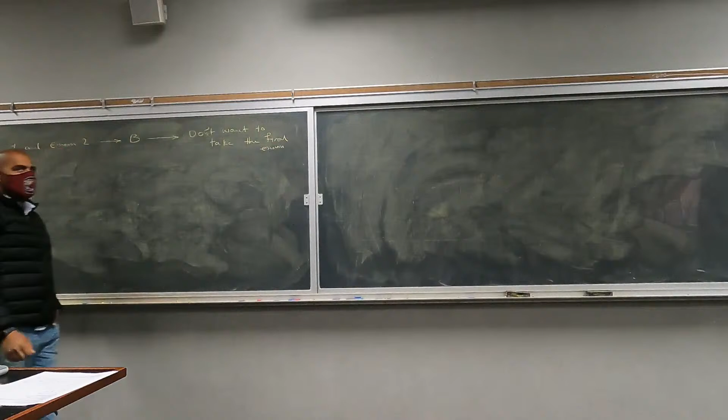If you have already done well on your exam 1 and exam 2, let's say you have received a B, or you have received a C and you are satisfied with your grade, right? You can send me an email and tell me that you don't want to take the final exam and you are satisfied with your grade. And that is perfectly acceptable to me, as long as you submit your final homework. Okay? So if you have like an A in exam 1, 2, you can send a request after your final exam. Yes, that's the idea.

Because essentially what I'm doing for the people who have not done well in their previous 2 exams is that the least thing I'm going to do is to drop one of the exam grades, right, and replace it with your final exam. So it's only fair for this to go the other way as well. If you have done well in your first 2 exams, you should be rewarded. Or if you're only satisfied with your grade. B is a very good grade. C is also a very good grade.

But if you think your grade is going to be less than C, it is probably a good idea to take the final exam, because there are a couple of courses that are going to need a grade C or better in this course. Okay. And next thing, if you have done well in one of the exams, 1 or 2, one of them, and if you do well on your final,

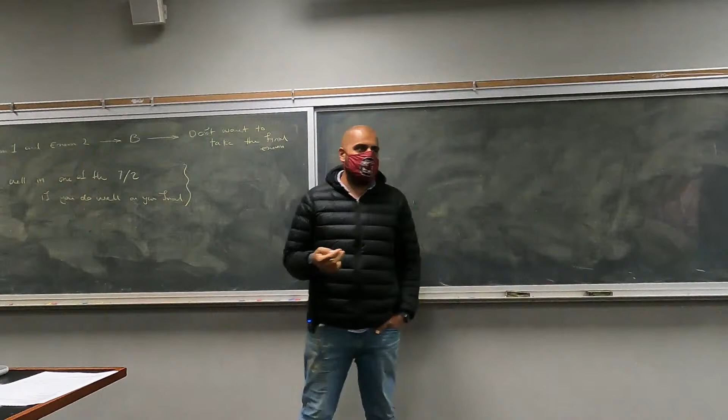I'm going to replace your lowest grade with your highest grade. Doesn't really matter if you have done well or not done well. This is one thing I'm going to do, right? Let's say your exam 1 grade is 70, your exam 2 grade is 85, and your final exam grade is 82, right? I will replace your exam 1 grade with exam 2 grade, which is 85. And that applies to everyone in the class. Okay?

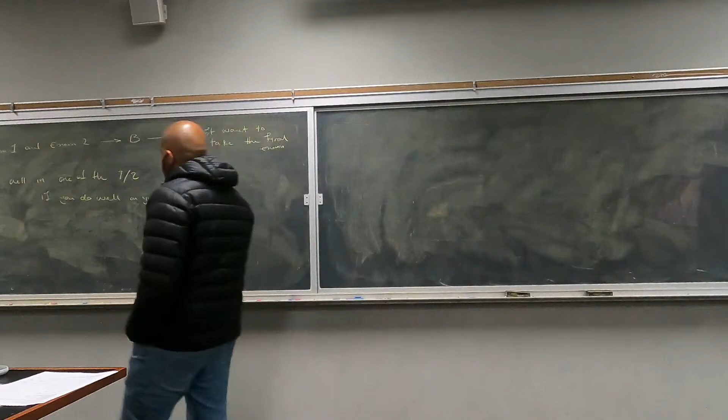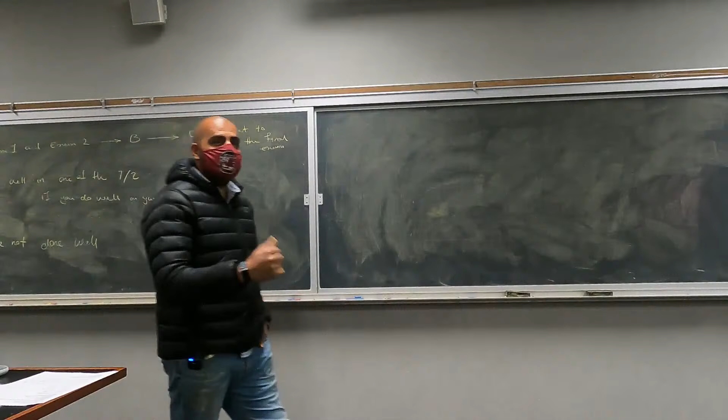And the third one is that if you have not done well in any of the exams, let's say your average grade is, I don't know, you have a failing grade, okay? But you have submitted all of your homeworks, you have come to all of the exams, you haven't missed anything, you have been through the class, and you get an A on your final. I will give you, depending on your grade and your average, a B or a B plus, right? Does this make sense?

And there are a couple of people who have not participated, taken their exam 1 or 2, or have not submitted their homework. If you are in that group, and if you do very well on your final, if you get an A on your final, I will give you a C out of the course, right? So your final exam grade can actually change everything, right?

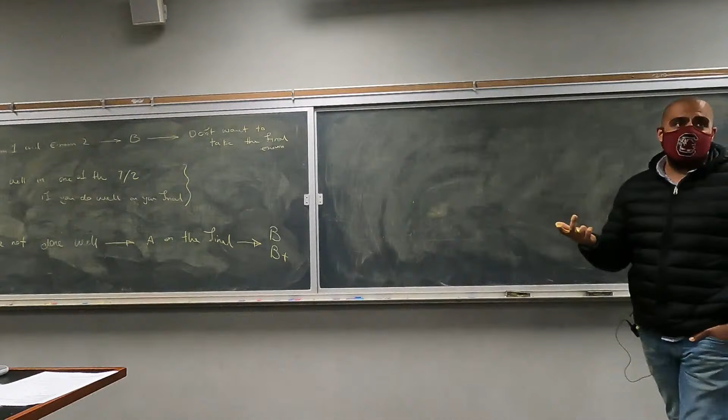And there are a couple of people who have progressed very well in the course, like from a very bad grade on exam 1 to a very good grade on exam 2. If you continue on your progress, you will definitely be rewarded, right? Are there any questions about the grades? No. Okay, so it is all clear, hopefully.

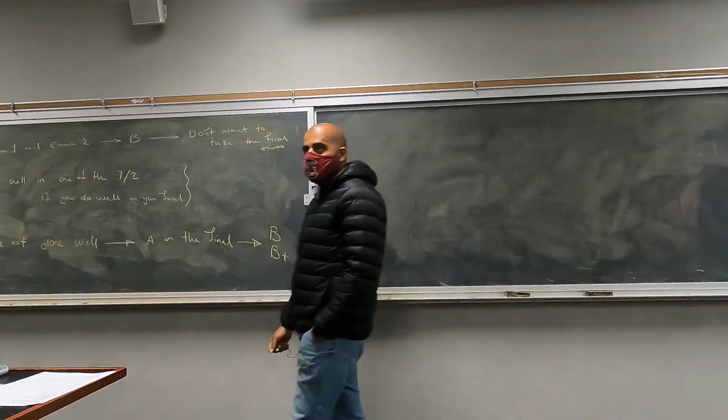So let's talk about, and this is what we're going to do today. I'm going to read through these conceptual problems. I will ask for an answer. If you have the answer, you'll get a bonus point. If not, I will just give a brief answer and move on, okay? The same thing we did in the previous lecture.

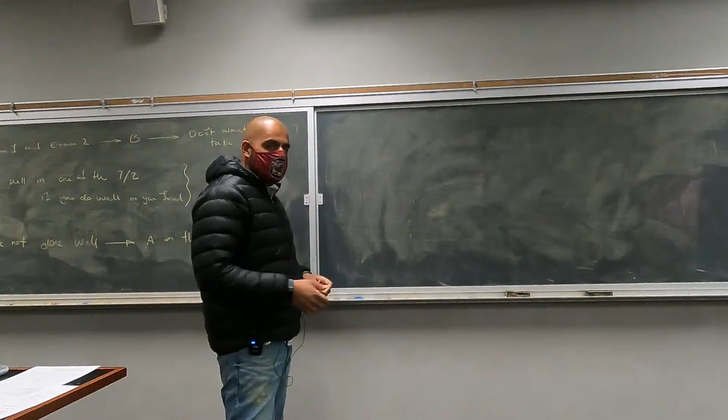But I need to borrow a pen. Is there anyone who has an extra pen or a pencil that I can borrow? I forgot to bring my own pen. Thank you. Thanks.

Okay, so what are absolute and gauge pressures? Absolute includes the atmospheric pressure as well as the pressure inside the tank. And gauge is just whatever's inside the tank. Okay. So essentially, your absolute pressure as compared to the vacuum pressure, this doesn't work.

Can I get it? I'm sorry. Thank you.

So absolute pressure, you compare your pressure with the vacuum pressure, which is essentially zero pressure. But the gauge pressure, you compare your pressure with the atmospheric pressure, right? So what is the gauge pressure of the regular atmosphere? The gauge pressure, not the absolute. Zero, exactly.

Okay, the next part is what is viscosity? Do we have any takers here? Viscosity was essentially the thickness of your fluid, right? In an exam, you have to explain it a little better, but how easy or hard it is for a fluid to flow and how it responds to the shear stress.

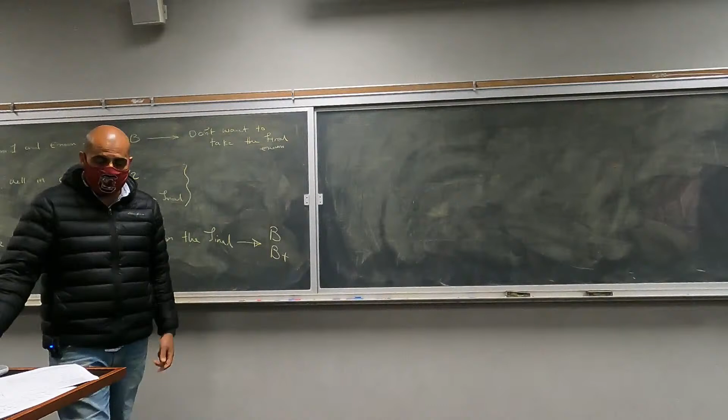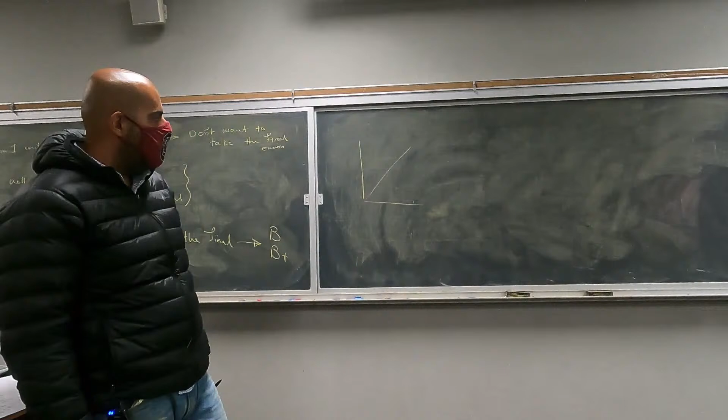Next question, what are Newtonian fluids and what are non-Newtonian fluids? Do we remember this? Newtonian fluids were the fluids that had a linear relationship, right? Their shear stress had a linear relationship with viscosity, like this. We talked about it in chapter 1, so they are already in the lecture notes. If you go back to lecture notes, you will see that this is there. So they have a linear relationship, and this is the relationship between viscosity and shear stress.

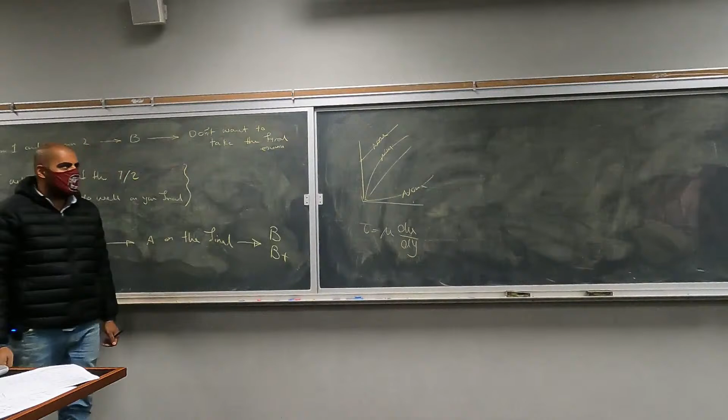But we have non-Newtonian fluids that do not behave linearly. These are all non-Newtonian. Viscosity does not change linearly with the shear stress. And the examples of it are shear thinning, shear thickening fluids, and Bingham fluids. These are also in your notes.

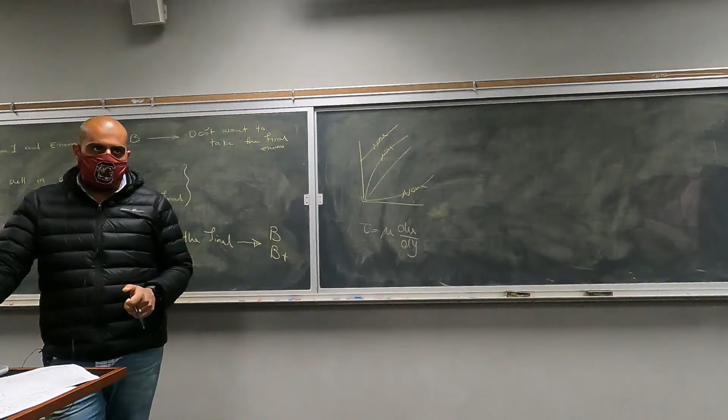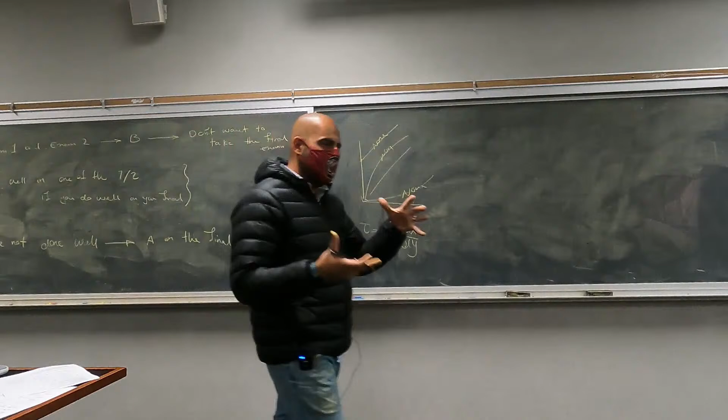What is the vapor pressure? When the equilibrium condition is reached, the number of molecules leaving is equal to the number of molecules entering. Equilibrium condition. So essentially that's exact. If you have a fluid in a closed container, you will have vapor forming on top of that liquid. When it reaches the equilibrium, that pressure of that vapor is called the vapor pressure.

What's your name? Hannah. Okay.

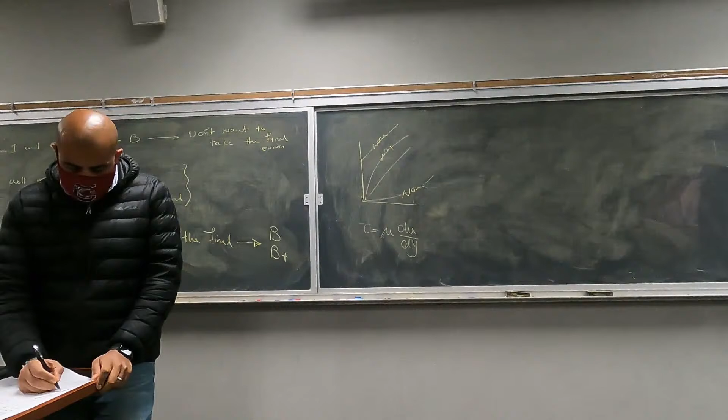What is pressure? This will probably show up in some form or another on your exam, because a lot of you struggle with the concept of pressure. Anyone? Yeah. That's it. What kind of force, though? What's the direction of that force? Normal force, right? But you'll get the bonus anyway, so don't worry about it. Pressure is normal force per unit area. Let's say this is your force applied to the surface. Pressure is the normal component of that force divided by your area. So pressure, normal force per unit area.

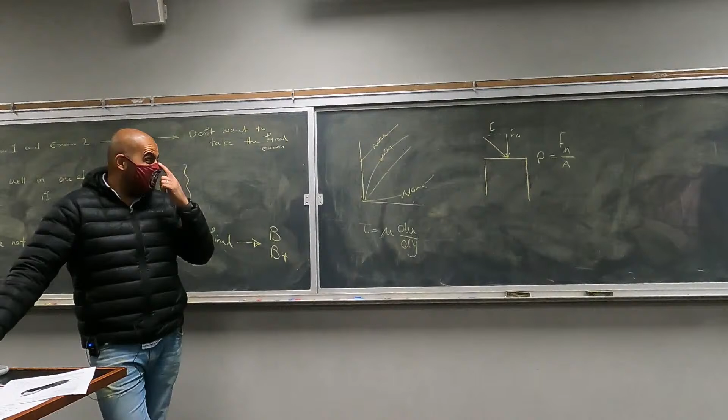And the next one is something we had on exam 1 as well. What does Pascal's law tell us? Yes. Pressure is the same at one point in all directions. Exactly. So at one point in a fluid, pressure is independent of direction. It's going to be the same. Ansley, right? I don't know how to spell your name, but okay.

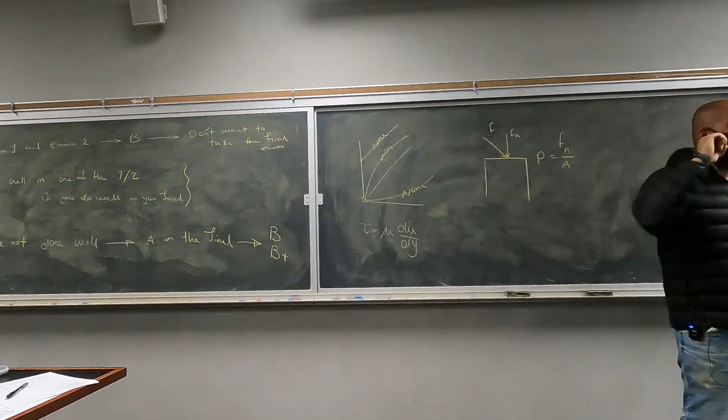So what are the two types of forces in a fluid? The question itself is a little vague, so let me just answer it. We have volume forces or body forces that apply to the whole volume, like weight. We also have pressure forces or shear forces that only apply to the surface of a fluid. Pressure only applies to the surface. Weight applies to the whole volume. So body forces and surface forces.

What else? Define a free surface. Yes. And not just like any fluid surface that's like open to the atmosphere. That's it. That's any fluid surface that is open to the atmosphere. And on a free surface, pressure remains the same, right? That's actually a very important point as well.

Write down your name as well.

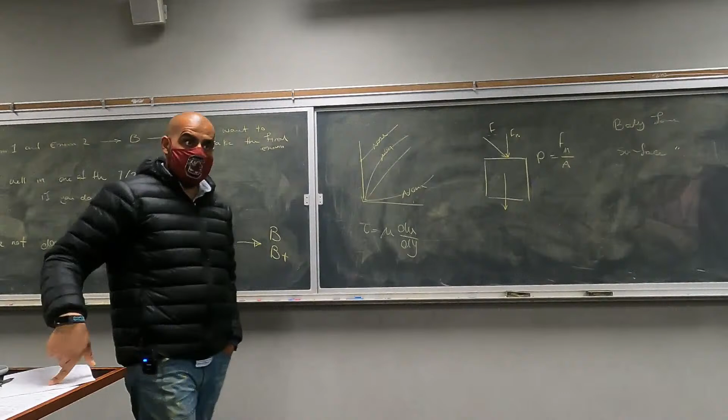And there are a couple of topics that I want you to learn. Go back, we actually have a very extensive discussion in the lecture notes. We talked about it extensively in class 2: buoyancy, flotation, and stability. This was also in exam 1, and a lot of people struggled there. If you go back to the lecture notes, you will see 3 or 4 pages, and you will definitely learn what is going on there. There's a 90% chance this will show up on the exam as well.

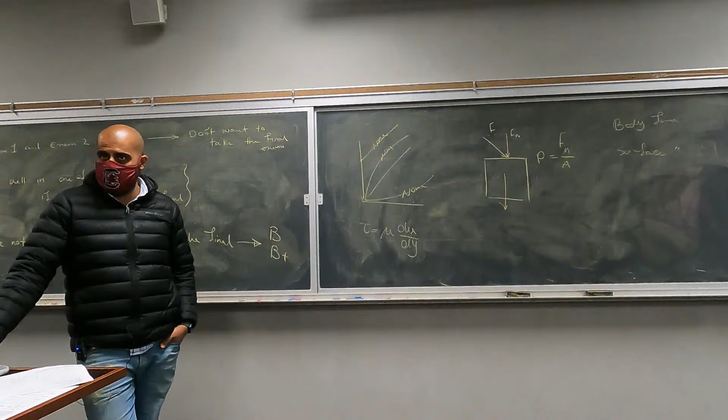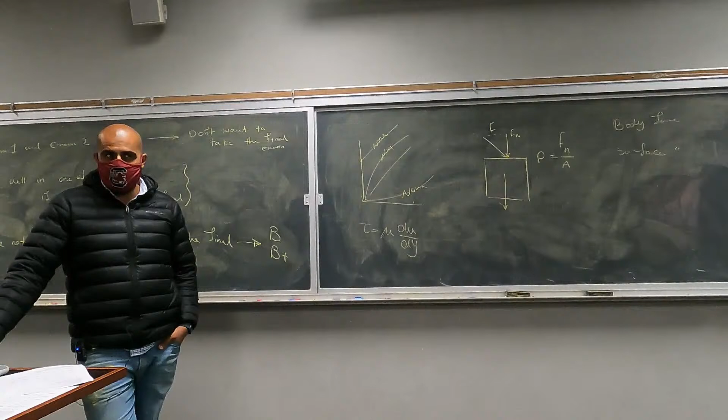And we also have the static, dynamic, and total pressure. Is there anyone who can tell me what are static, dynamic, and total pressures? Do we remember these concepts? Static pressure is when the fluid's at rest, and then dynamic pressure is obviously when it's moving, but it's some formula I don't remember.

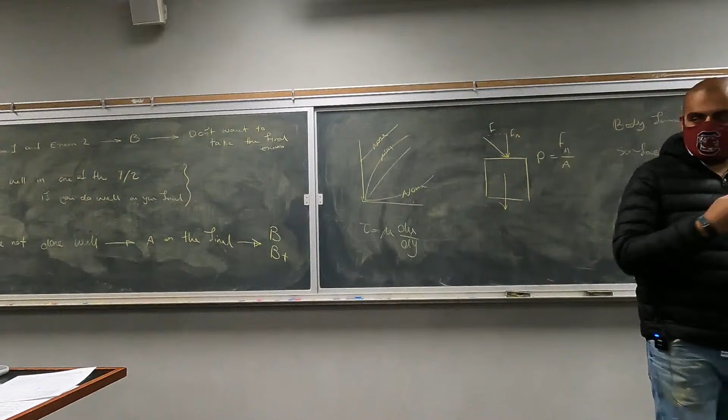So you said it the other way around. A static pressure is the pressure you're going to feel when you sit on a moving particle of fluid. That particle can be moving or be at rest. Like the static pressure inside this room is 1 atmosphere. But the total pressure, not dynamic, is the pressure you are going to feel if you bring down the velocity of a fluid particle to 0 isentropically, right? That was the definition of total pressure. And the dynamic pressure is the difference between the two.

So total pressure, which is also called stagnation pressure, is equal to static pressure plus dynamic pressure, Q infinity. You can actually calculate Q infinity with 1/2 rho V infinity squared.

And what was your name? No, yeah, I keep forgetting your name.

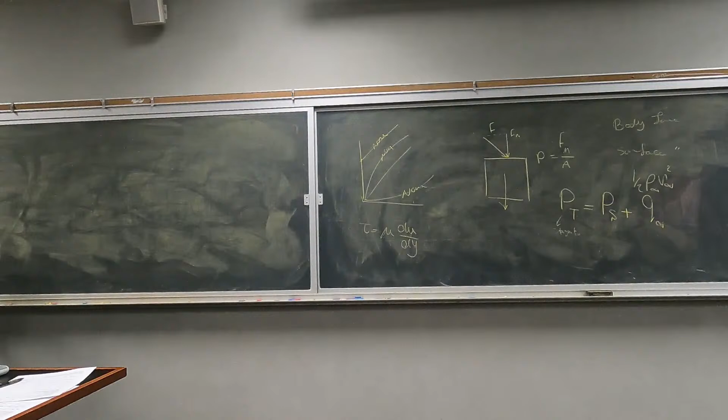So the next question, this is something that we need to talk about: what are the Navier-Stokes equations? You are already familiar with the momentum equation and how we find it, using the Reynolds transport theorem, right? Sigma F, that was the momentum equation from an integral perspective, which essentially means that it has integrals in it. The d of linear momentum of the system over dt, the total derivative, was equal to partial t of the integral of rho V dV, right? That was the general form of the equation, which we very rarely use.

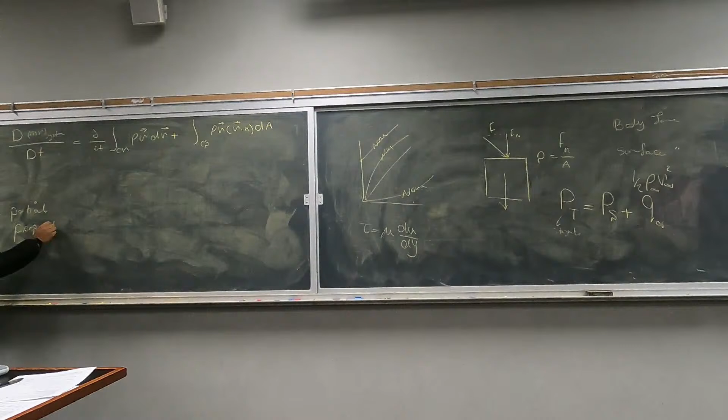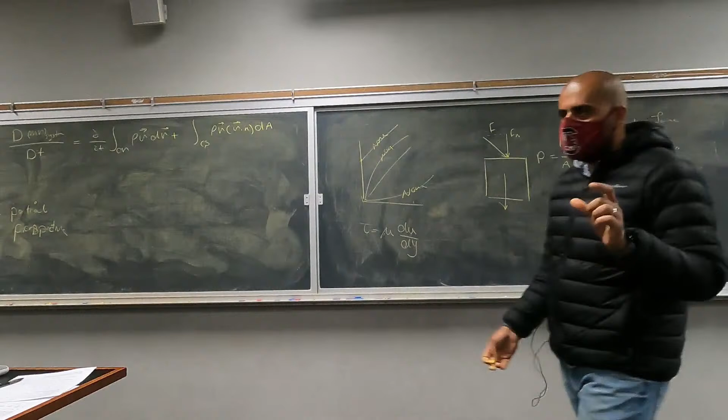Okay, so this is the momentum equation. Using this momentum equation, you can find the velocities, the different characteristics of the flow, and so on. This will definitely show up on your exam as a problem that you need to solve. But the Navier-Stokes equation comes from a partial perspective. So what is a partial perspective? In an integral perspective, we applied this force balance to a system. This system can be very big, the size of this room. It can be small, but it's not considered a very small element in a fluid.

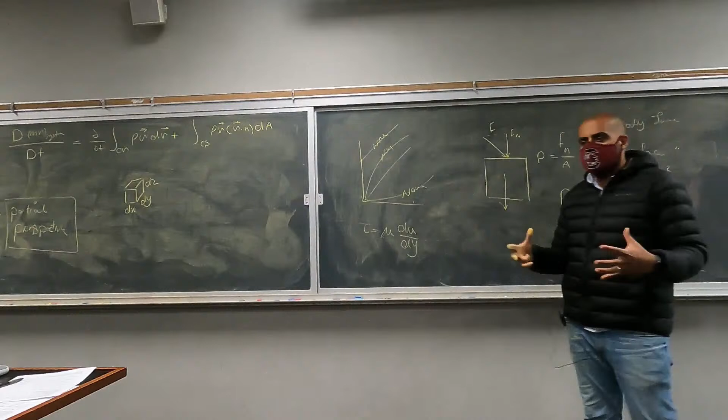But the partial perspective applies this force balance to a very small element inside your fluid. This small element, which I'm sure you have seen a lot, in a Cartesian coordinate system has the size of dx, dy, dz, right? So whenever you move to a differential analysis of a very small element, you are going to have this partial or differential perspective. But how can we find a momentum equation for that perspective? We can actually apply the same idea here.

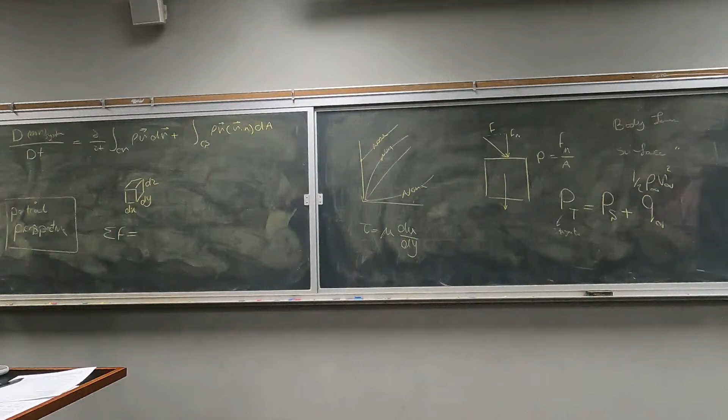Sigma F is going to be equal to the total derivative of rho V with respect to time, and everything is divided by the volume. I'm not going to go through the derivations, but that's the idea. So the total derivative of this is going to be partial rho V partial t, right? Plus the velocity in your one direction. This actually is going to be V del. That's the general definition multiplied by rho.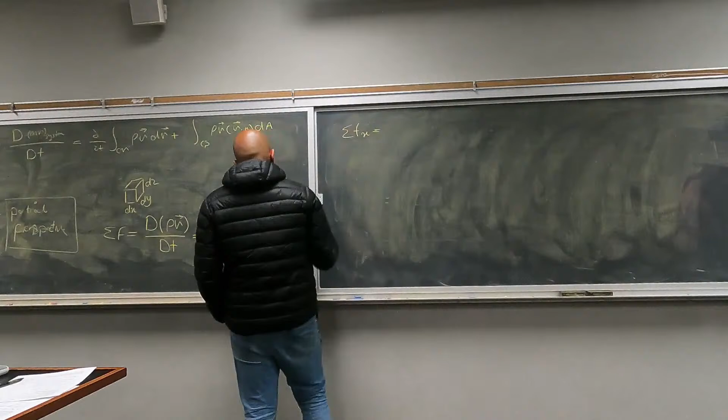But we can expand it to different directions. So we have three different directions, x, y, and z. Let's do the sigma F. Let's write this equation for the x direction. We're going to get partial rho u, partial t. Again, this is general form. Velocity in the x direction, partial rho u, partial x. Velocity in the y direction, partial rho u, partial y. Velocity in the z direction, partial rho u, partial z, right?

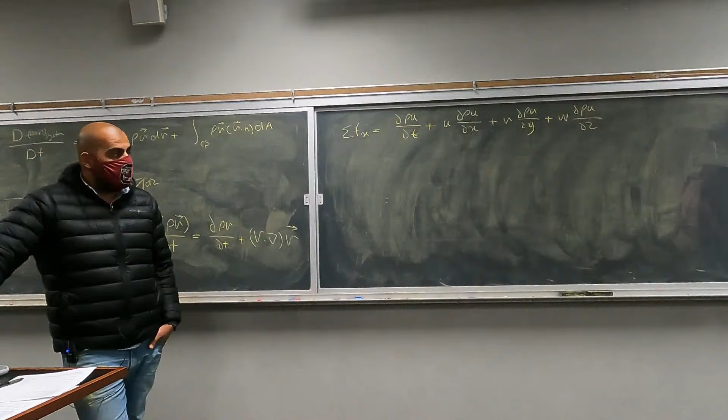So this part is just an expansion of the total derivative, which you have already seen. We actually had an example of this on the exam. Okay, so this is the right-hand side of this equation. The left-hand side is the forces. We already know that the pressure forces always exist, right? We also have shear forces present here. And there's also the presence of your body force. So depending on the direction of the flow, we are going to have negative rho gx. Everything is divided by volume. So mg, your weight, is going to be rho gx, minus the changes in pressure in the x direction, plus your shear in the x direction, equals whatever that is over there, the right-hand side.

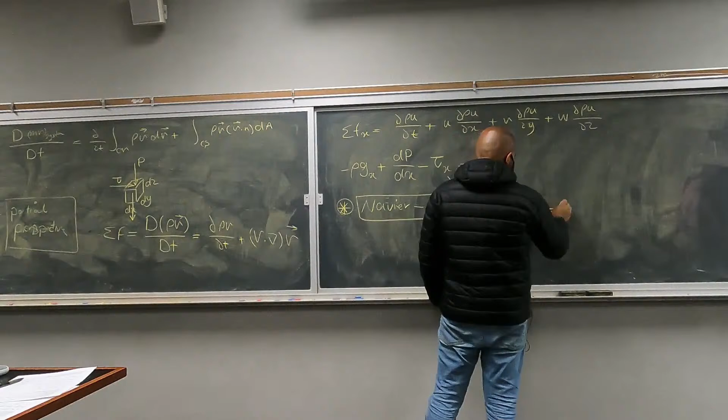From this part forward, the next simplification makes this equation the Navier-Stokes equation. The reason they call it the Navier-Stokes equation is because it was developed by Navier and Stokes. This essentially gives you a simplification on how to calculate your shear stress. Your shear stress is going to be mu times partial squared u over partial x squared plus partial squared u over partial y squared plus partial squared u over partial z squared. And the same thing applies for the other directions.

Okay, so the Navier-Stokes equation is going to be negative rho gx minus the changes of pressure, plus the shear, which is this, equals this side. If I ask you to write the Navier-Stokes equation, this is the equation you have to present. And I assume you already heard the explanation. So it must be followed by an explanation of what this equation represents, right? And this will be a question on your exam.

That's 100%. I will ask you to give me the integral perspective of the momentum equation, the differential or partial perspective of the momentum equation, which is going to be this. And then I will ask you to write down the Navier-Stokes equation, which is this equation, and tell me what this Navier-Stokes equation represents, which is essentially the momentum equation, right? Just the application of the momentum equation in a very small element of the fluid. Okay?

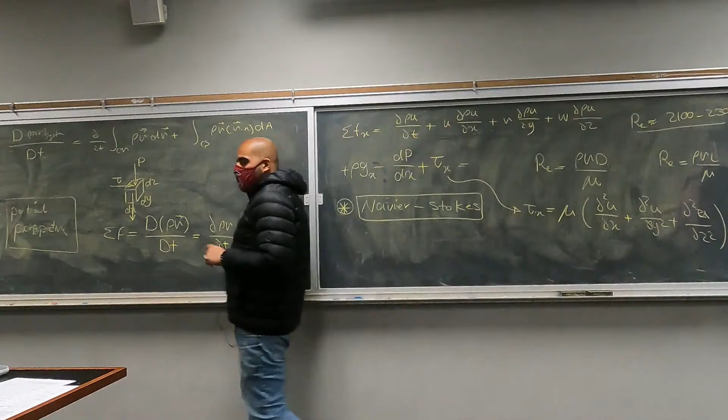What is the value of the transition? When does the transition to turbulent begin? At which Reynolds number in pipe flow? These are values you have to have readily available. I mean, you have to memorize this. In internal flow, or a flow inside a pipe, transition happens at a Reynolds number of 2100 to 2300. That's the beauty of Reynolds number. We don't need to know the type of liquid or type of pipe, just this Reynolds number. If you can calculate it for a specific type of flow, you can say whether it's laminar, turbulent, or in transition. Okay, Cooper.

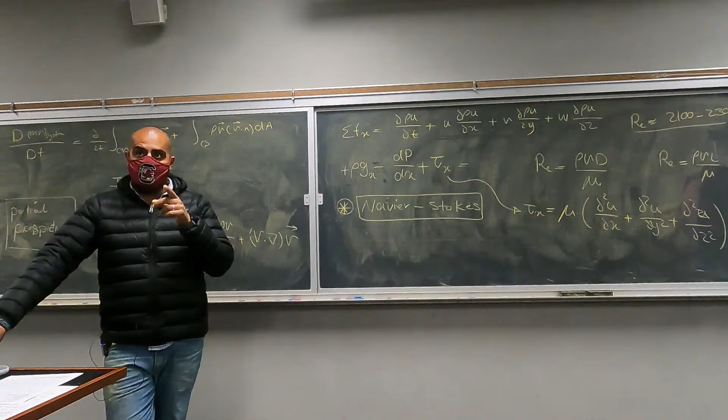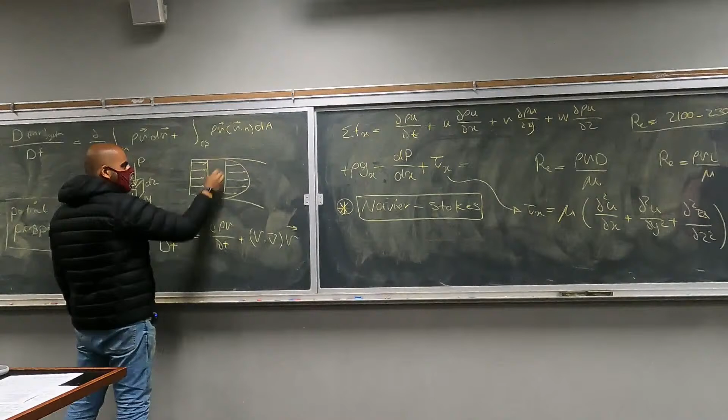Two. What is the difference between laminar and turbulent flow? Okay, exactly. So laminar is not necessarily uniform velocity, but it is orderly, right? What does this mean? Let's say this is your pipe; a uniform velocity means your velocity is the same everywhere. In a laminar flow, you can actually have this type of distribution of velocity. But the point is the velocity here is going to remain the same over a span of time, right? It will always be like 2 meters per second, 2 feet per second, whatever.

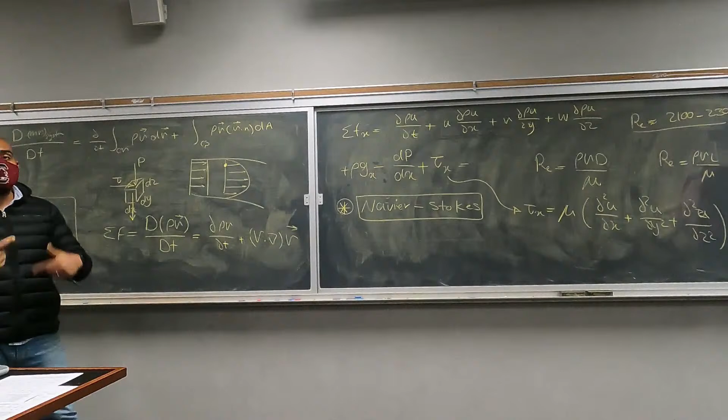But in a turbulent flow, you will have a lot of fluctuations. You will have a lot of vortices. You will have a lot of mixing happening, right? Which you don't see in a laminar flow. Okay. What is the entrance length in pipe flow, and how do you calculate it? Anyone remember?

Okay. Entrance length. Do you have anyone? No. If you recall, the idea was that, let's say this is your pipe. Flow outside of the pipe is uniform at V infinity, right? When your flow gets to the pipe at the beginning, because of the presence of the wall and the no slip boundary condition, the velocity at the wall will be 0, right? And there will be a region in which velocity goes from 0 to 1, 2, 3, to 4, and increases until it gets to V infinity, right?

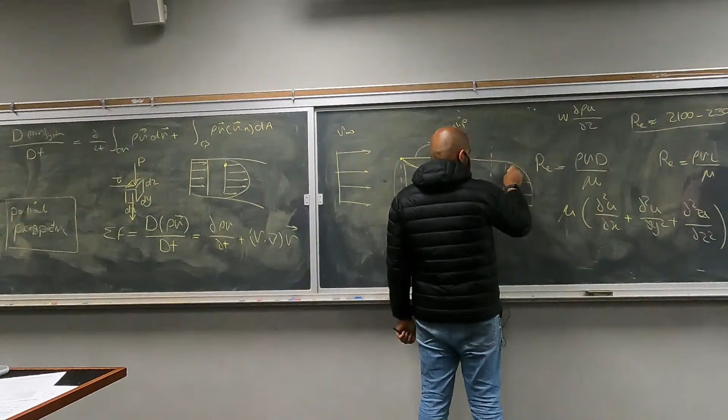And that region is called the boundary layer, in which velocity goes from 0 to V infinity, whatever this velocity outside is. These boundary layers' thickness increases as you go further into the pipe. And at some point, they merge with each other. That location is called the entrance length. Right? And after this location, we have fully developed flow. Velocity distribution looks like this, and it's going to stay the same throughout the pipe, right?

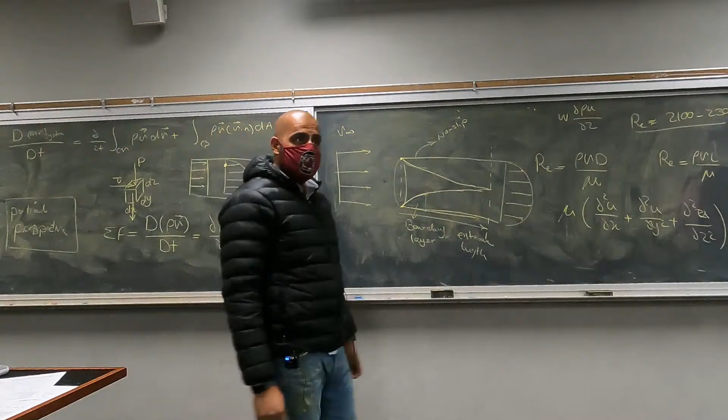And for the length of this, we have two main equations. If you go back to your notes, you will see those two main equations. One equation is only for laminar flow. The other equation is for turbulent flow. Okay. Any questions?

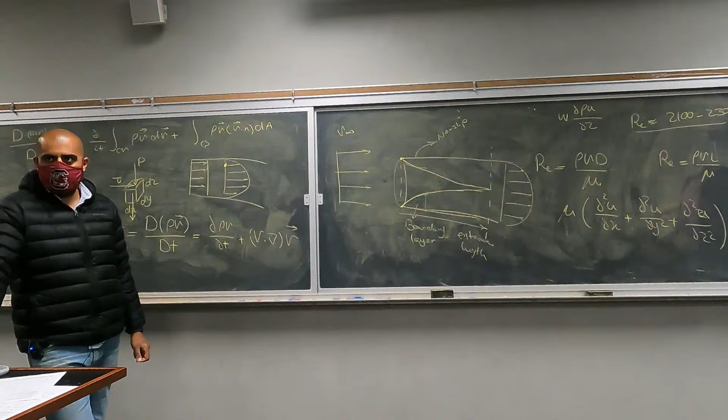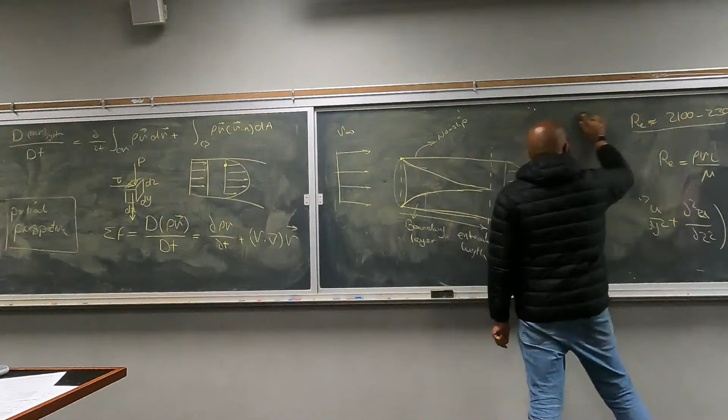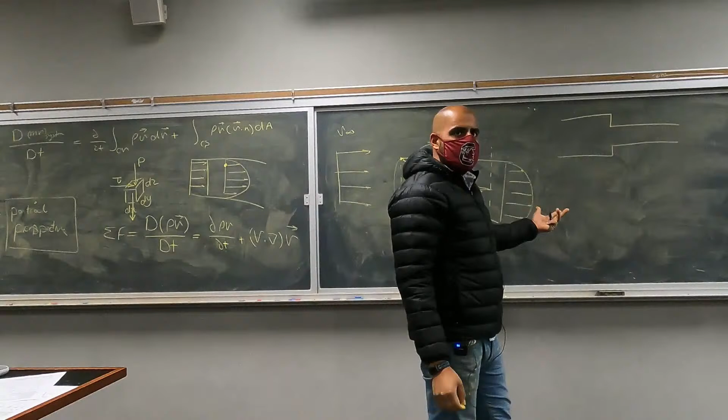No? Moving on. What are the different types of pipe networks? This is something we discussed at the end of our discussion on pipe flows. We have two main types of pipe networks. One was parallel, the other one was series. So series is essentially when your pipe's diameter changes, or its shape, or whatever changes. This is a pipe in series. But this one is a pipe in parallel.

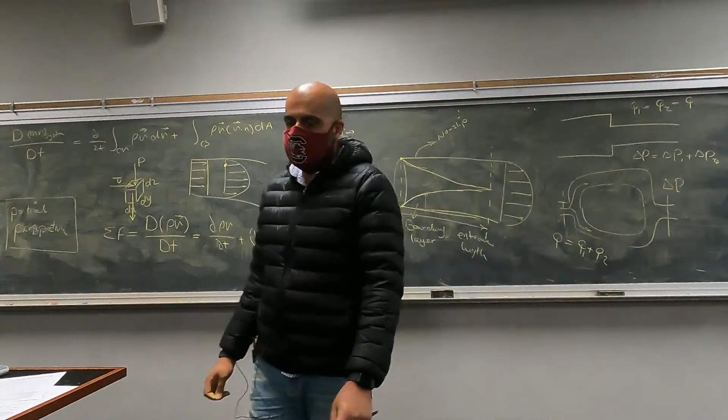The idea was, in parallel, your delta P, or your pressure loss of the two pipes, is going to remain the same. But the volumetric flow rate total is going to be equal to Q1 plus Q2. But in the series case, your volumetric flow rate is the thing that remains constant, and your delta P is the thing that must be added up. If you actually end up in a company whose sole purpose is to do the piping in houses or buildings, all of your analysis will use this basic concept. Okay.

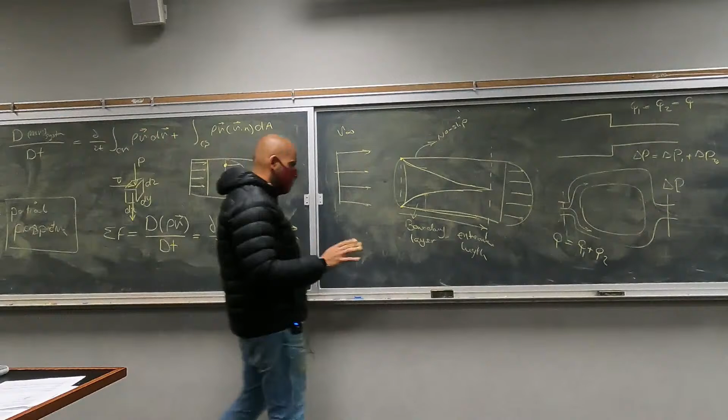Next one. What is the Moody chart or Moody diagram? And what does it mainly calculate? Do we have anyone? Go ahead. It shows where the pipe has turbulent flow and laminar flow. It shows the values of the Reynolds number. Okay, you're getting somewhere, but that's not necessarily the correct place.

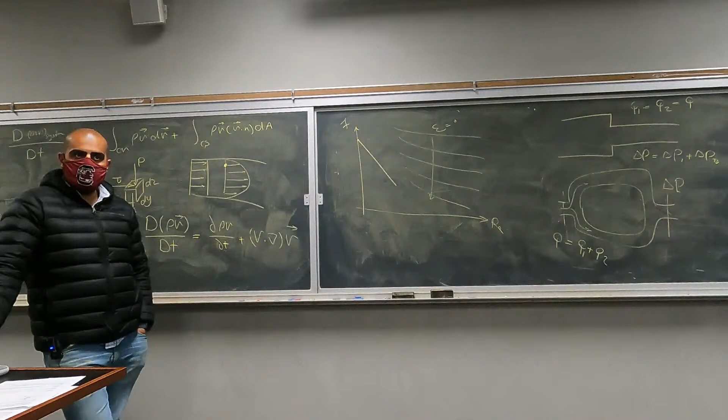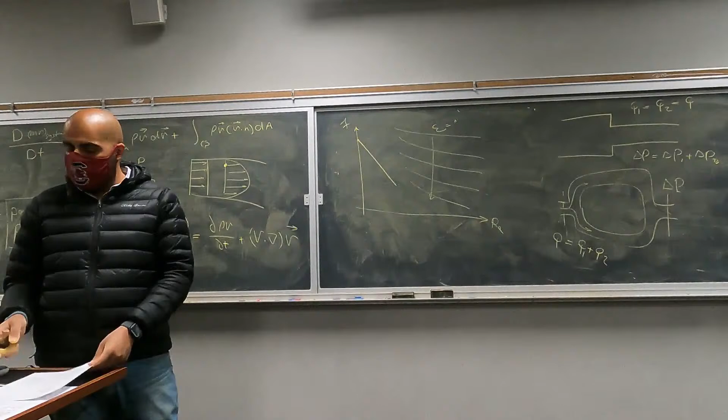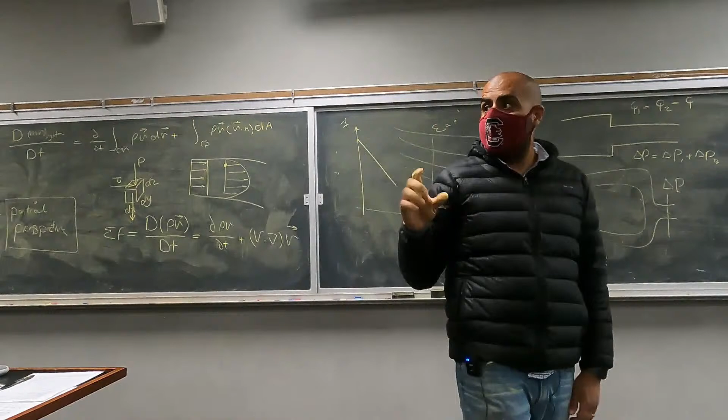What are the major and minor losses in pipes? Oh no, let me give you a bonus. Yes. Usually, major losses are like when the flow is turning, and minor losses are along the surface of the pipe. So the major loss is the pressure drop along the pipe that you calculate, but minor losses are the losses that occur because of the fittings or the changes in direction inside the pipe, right? Okay, so minor is change in direction, the major ones are because of the system. Exactly. Because of the length of the pipe.

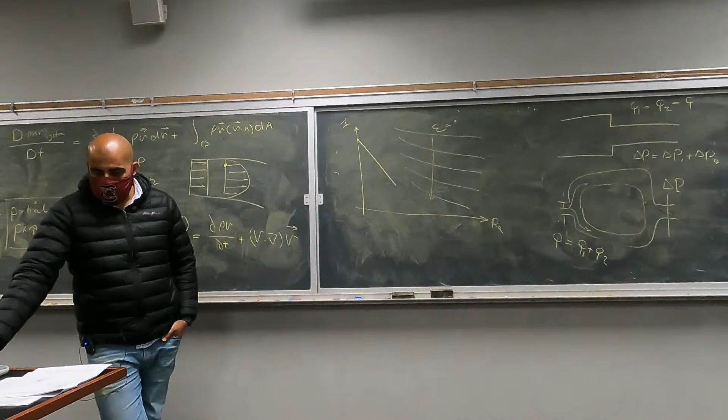Do we have any questions so far? So these are all the conceptual problems we could get from these chapters. Okay. Let's move on to the other problems. Two of them are problems we have already solved. I just wanted to bring one of them to your attention, problem 3.74. How many do we have? Let's see.

Yeah, one of them. This problem 3.74, which is a book problem, is telling us the oil of a specific gravity of 0.83 flows in a pipe shown in the figure below. If viscous effects are neglected, what is the flow rate? Okay. The first thing you need to understand here is that because we are neglecting the viscous effects, you can write the Bernoulli's between the 2 points.

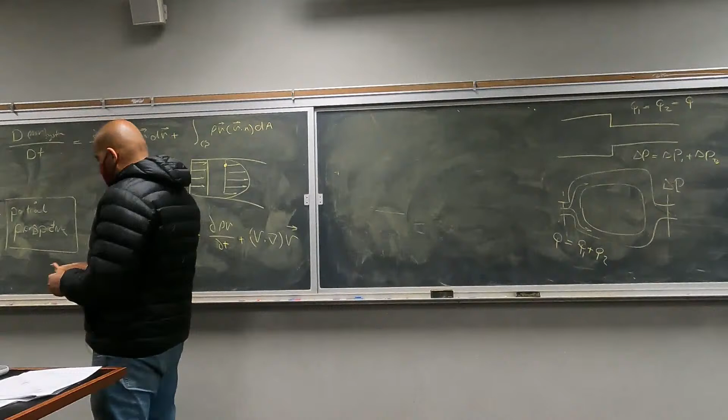So what is the Bernoulli's equation? P1 divided by gamma plus V1 squared over 2G plus Z1 is equal to P2 divided by gamma plus V2 squared over 2G plus Z2. It has different forms. The elevation doesn't change, so this goes away.

Okay, if you look at the type of the points we have, let me draw the shape. You have this pipe going in like this, and you have it in front of you. This is point 2. This is point 1. If you recall from the pitot tube discussion we had earlier, this type of pipe brings down the velocity to 0 isentropically. That's how we measure the total pressure. So velocity at 1 is actually 0, right?

And what do we want to calculate? We want to calculate the flow rate. And this measurement at 2 is going to give us the static pressure. So the total pressure, stagnation pressure, and the static pressure. For 1, we're going to get the total pressure. This is 0. And here we're going to get the static pressure. And this is going to give us the velocity that we can use to calculate the flow rate. I mean, we can use any velocity to calculate the flow rate, but yeah.

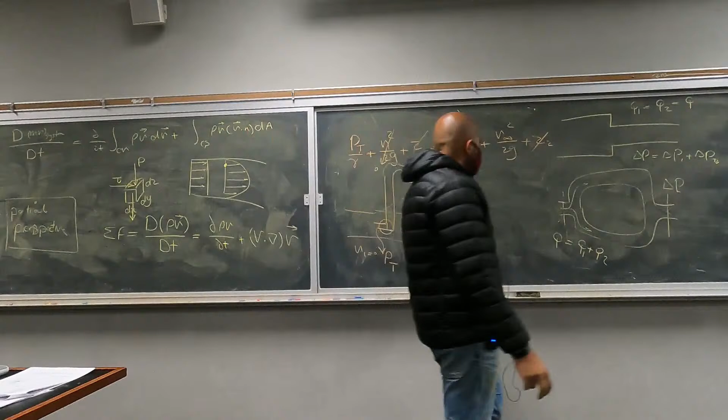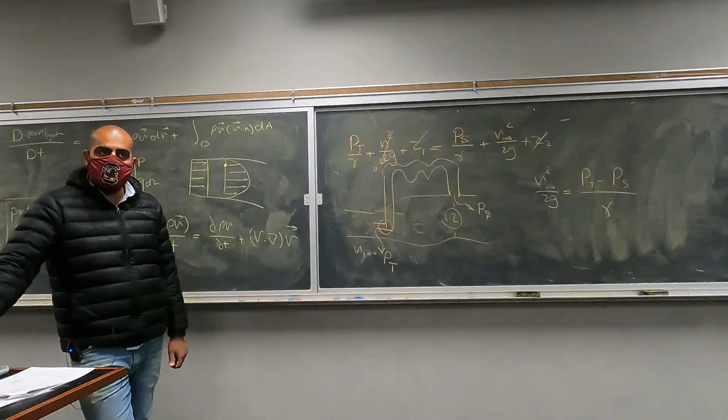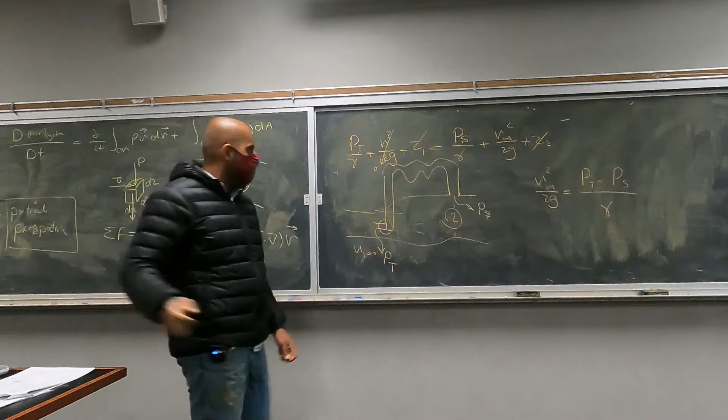And so this V2 squared over 2G is going to equal to PT minus PS divided by gamma, right? How can we calculate PT minus PS? We have the system of the pipes there. We have to use that pipe system. And we are given all the lengths over there, right? This is something we had in exam 1, very similar to this.

Okay. This is the shape. We have a different fluid inside here. This height is 4 inches. So to find the P1 minus P2, we just have to move along this pipe, right? The only points that we can take away from this is that at this point 3, the pressure here and here are the same. And also, we can have the same conclusion for this point 4. Okay.

Well, what is the relationship between P4 and P2? You are moving down, so your pressure is increasing. Let's call this height H, right? So P4 is going to be P2; you're moving down, so you just have to add to your pressure: P4 plus gamma H equals to P2. What about this P3? Let's assume this length is L: P3 plus gamma L is equal to P1.

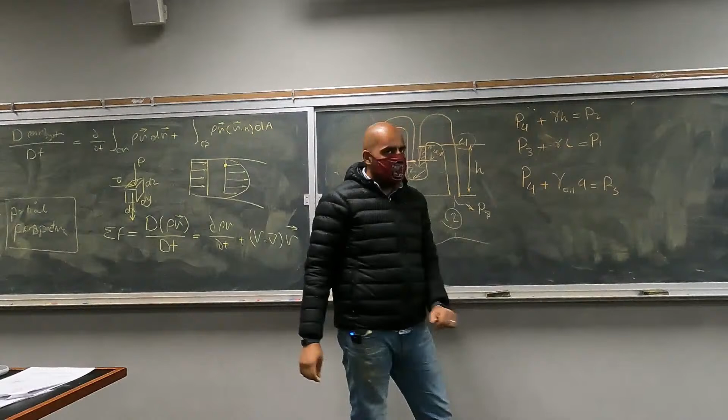So the only other thing we need to find here is the relationship between these two, right? And the relationship between these two is actually going to be the pressure difference between these 2 points. Since we are moving down from this P4, your pressure is increasing. That's gamma of, I think it's a type of oil, multiplied by 9 inch, is equal to P3. You plug in all these equations for P4 and P3, you will find the relationship between P1 and P2.

Is this clear? Do you remember this? Because we had a lot of people who struggled with these types of calculations. So if you have a question, you should ask now. I mean, you can always send me an email and ask your questions, and you're in a class setting, your classmates can also use it. Okay, so if you don't have a question, I guess everyone's clear. Just plug in the numbers. You should be able to do the calculations.

And then how do we relate velocity to flow rate? That's Q equals your area multiplied by velocity. So the area at point 2, right? This area at this point, multiplied by the velocity. That's how you calculate the flow rate. You will also definitely see this type of problem on your exam. Okay.

Okay. So problem 8.9, that's the first problem we want to solve from chapter 8. It's telling us for a fully developed laminar pipe flow in a circular pipe, the velocity profile is given by this in meters per second, where R is the inner radius of the pipe. Assuming the pipe diameter is 4 centimeters, find the maximum and average velocity in the pipe.

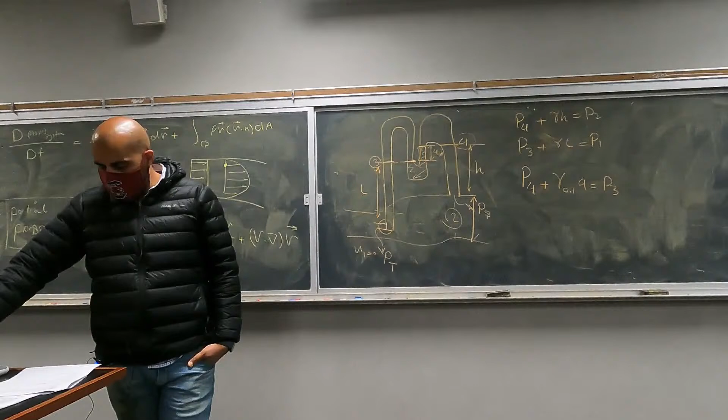So if you recall, the idea was in a fully developed pipe flow, your velocity distribution, and this is the general formula, as a function of r is equal to your pressure drop multiplied by diameter squared, divided by 16 mu multiplied by the length of the pipe. That's the viscosity. Times 1 minus (2r divided by D) squared. And this part was the maximum velocity, V max, which happens at r equals 0, right, in the middle of the pipe.

What we are given is this. u(r) is equal to 2 times 1 minus (r divided by R) squared. Okay. So what does this mean for maximum velocity? What is the maximum velocity here? 2. That's it. And what was the average velocity? The relationship between average velocity and maximum velocity was this in a fully developed laminar flow. So your average velocity would be 1 meter per second.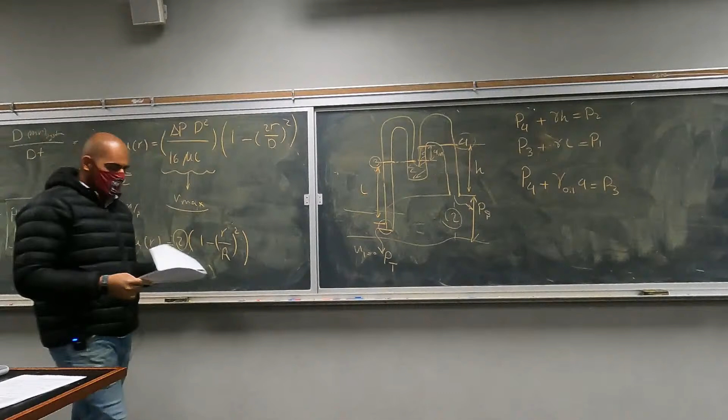Any questions here? No. Okay.

So next question, that's 8.17, is a type of question you probably get on an exam. Water at 60 degrees Fahrenheit flows at a rate of 4 gallons per minute through a 6-inch inner diameter plastic pipe. That ID refers to inner diameter. The pipe is 500 feet long and rises a vertical height of 40 feet over the 500 feet. Find the pressure drop. The first thing you need to do is to find the Reynolds number. Right? How do we find the Reynolds number?

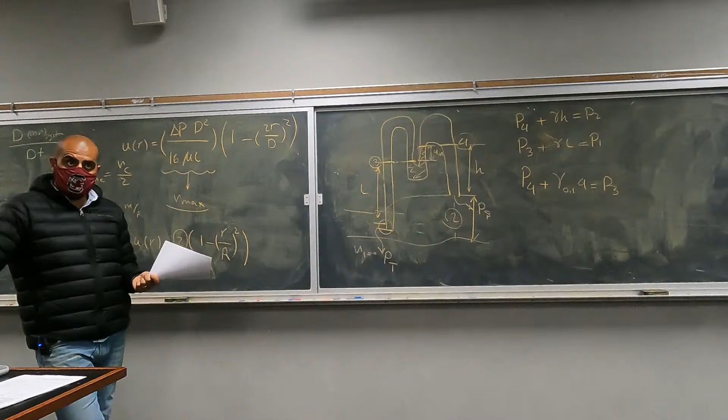There are different equations you can use to find the Reynolds number, but all of them go back to the main equation, which was rho V multiplied by diameter divided by mu. We can also write this in terms of your flow rate. If you write it in terms of flow rate, it's going to be 4Q over pi D nu. And nu here is the kinematic viscosity, which will be given to you. Okay.

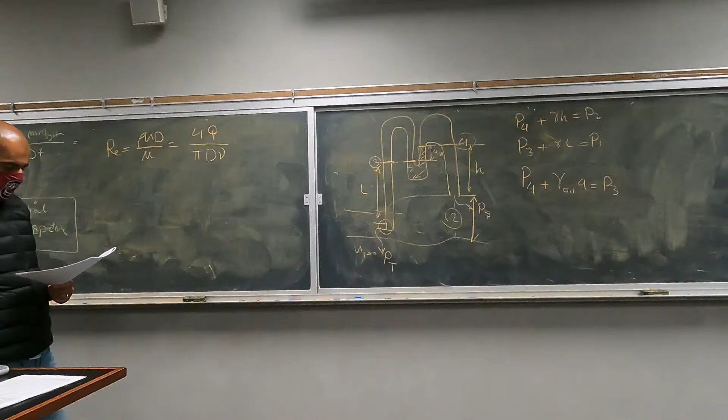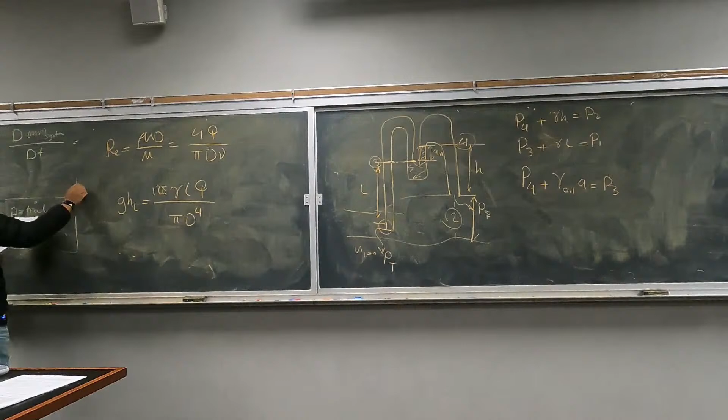We also had another equation for the energy loss of a fully developed pipe flow. That's g multiplied by h_L is equal to 128 nu Q L, that's the pipe length, divided by pi D to the 4. And this is for laminar flow, I forgot to mention. So you calculate the Reynolds number first. Then if you plug in the values, you're going to get 1876, which is smaller than 2100. So laminar flow, so you choose this equation for your laminar flow.

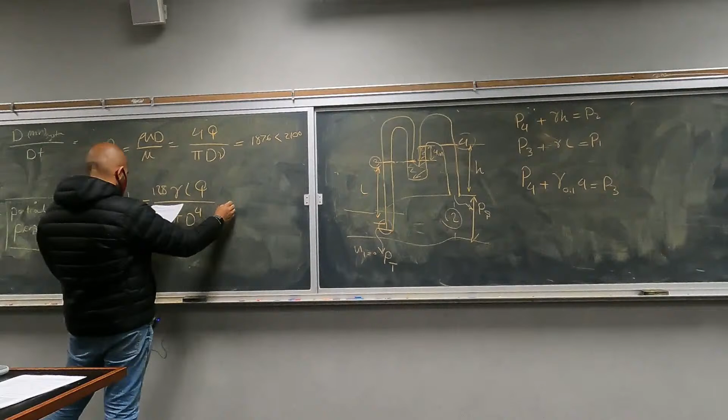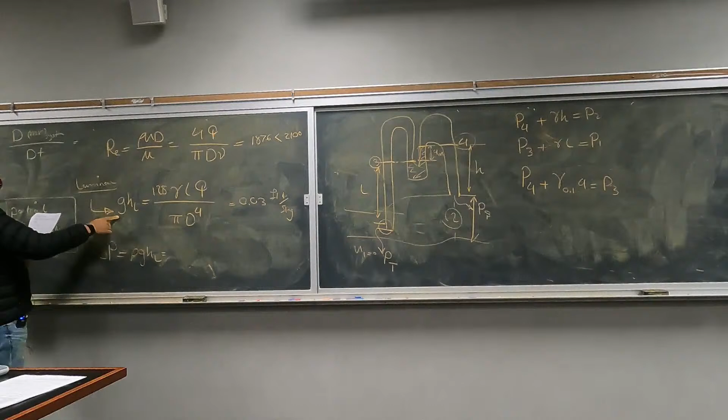And you plug in all of the values we already have. Your g h_L is going to be equal to 0.03 feet pounds per slug. And then your total pressure loss is going to be equal to rho g h_L. This is the head loss multiplied by the gravitational acceleration. To transfer it to pressure loss, you just have to multiply it by a density. And your total pressure loss is going to be 0.068 pounds per feet squared.

Do you have any questions? Is this all clear? Okay. Is there any other way? Can you think of any other way we can use to do the same analysis instead of using these equations? Because you may forget this equation on your equation sheet, right? Can you think of any other way? We actually had another equation that related all of these parameters to each other. Mass flow rate.

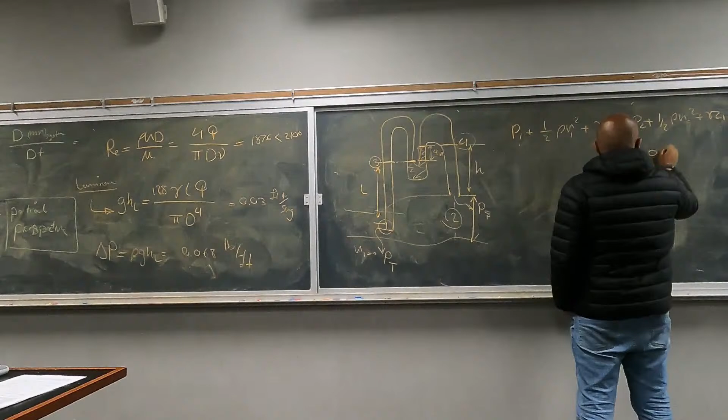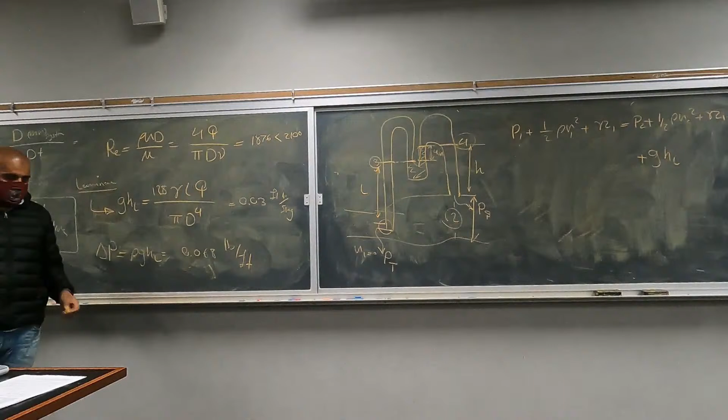What was the equation that was similar to Bernoulli's equation in the pipe flow? That's the head loss equation, essentially, right? So P1 plus 1/2 rho V1 squared plus gamma Z1 is equal to P2 plus 1/2 rho V2 squared plus gamma Z2 plus g multiplied by your head loss. Okay, if you calculate this head loss, or if you have the head loss or the other, we can use Bernoulli's mechanical energy equation. It's called the mechanical energy equation.

If you don't have any other questions, I guess I will also post this on Blackboard with its solutions for you to go over. So another type of question you might get on your final exam is the other question that we have. That's problem 8.20. I will give you the type of the pipe and also the flow rate. All of those things you need to calculate. And eventually, I will ask you whether this flow is laminar or turbulent. So your final goal would be to calculate the Reynolds number.